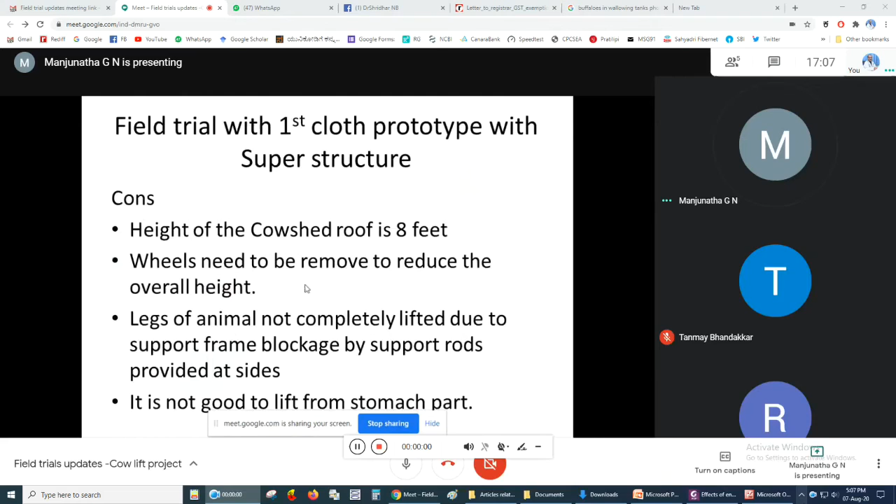Without superstructure, and also the second cloth prototype, we also tried without superstructure only. This is the down cow, around 4 feet height, and its back leg got fractured, so it is not able to lift or stand.

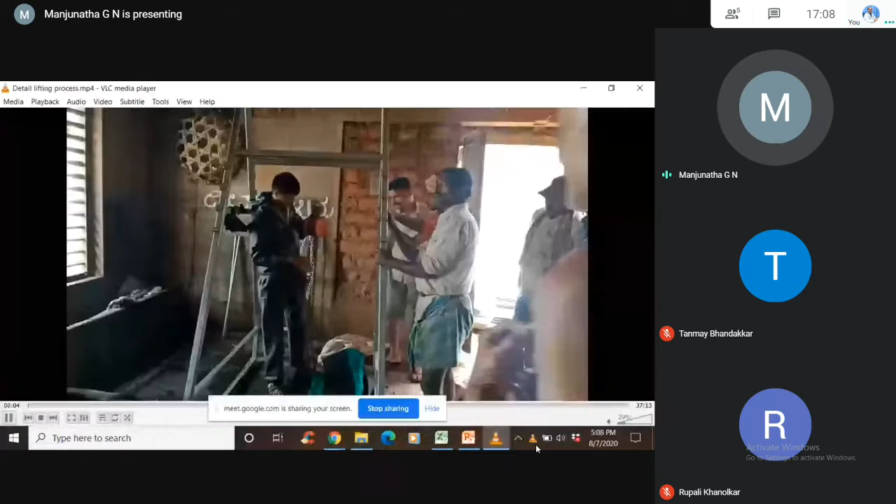So if you see here now, sir, the video is clear actually. It is around 10 to 11 GB, so I am not able to send it through Google Drive, but I will try to put it there and share it as soon as possible.

So this actually is the support rod where we got the problem, and directly I come to the point here. This is what we tried with the first cloth prototype. Since the height was more, we removed the wheel part, and we just used this, which comes around 7.9 feet.

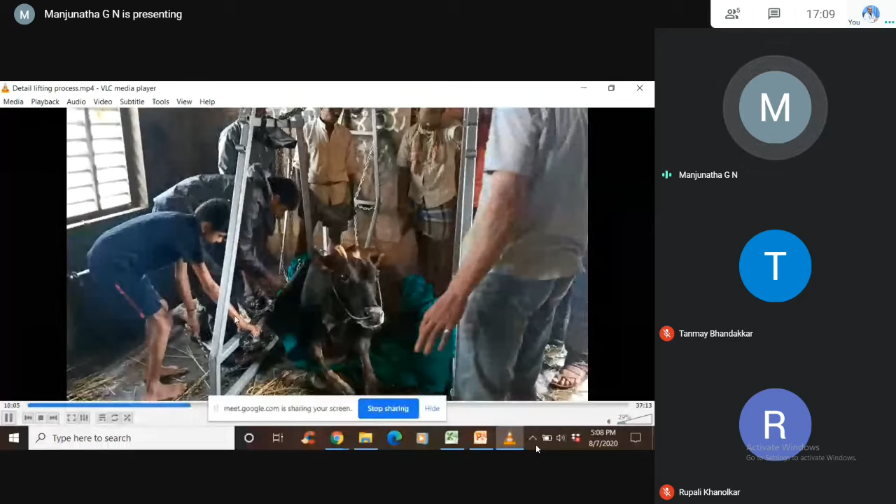In the video it is more clear, but we used this chain, which is around 3 feet. Now it is more, but we can reduce it to around 1 to 1.5 feet, it's sufficient. Also this hook, we purchased a standard hook and used it, but it is good we made it custom made, so there is no slipping. Sometimes it would remove while lifting, so that problem we faced.

Video is not... Okay, yes, actually. Yeah.

So actually, sir, I'm telling about the height issue, because this is mainly due to two reasons. One is, if you see here, I am pausing here, this support frame or support structure is getting blocked with this horizontal thing. Second thing about our cloth, this height is more. The cloth width, from rod to its backbone, is coming more, so it is actually not able to put its legs straight. So this problem we faced, and this is the height restriction problem we faced here.

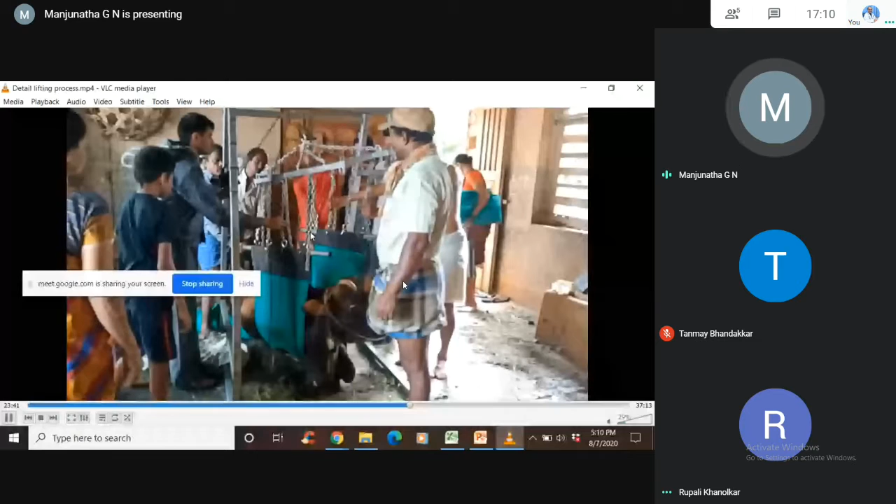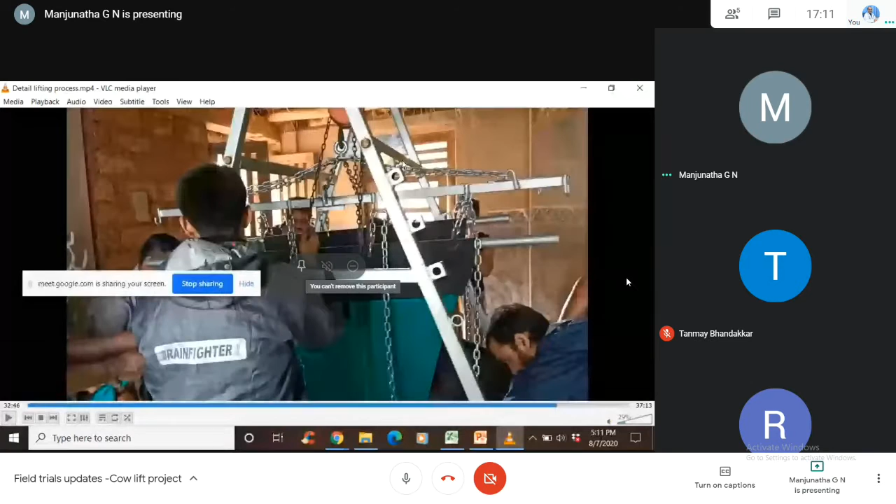And particularly, I go to another part here, and you can see the chain pulley got completely over, and we faced this issue. The chain gets locked, we're not able to move it further, and the cloth from back to the rod, this support rod, this height is more, this is also a problem for the height reason.

Actually, we are not able to hear you properly. I think the video size is very heavy, so maybe you stop playing and talk. Okay. Yes.

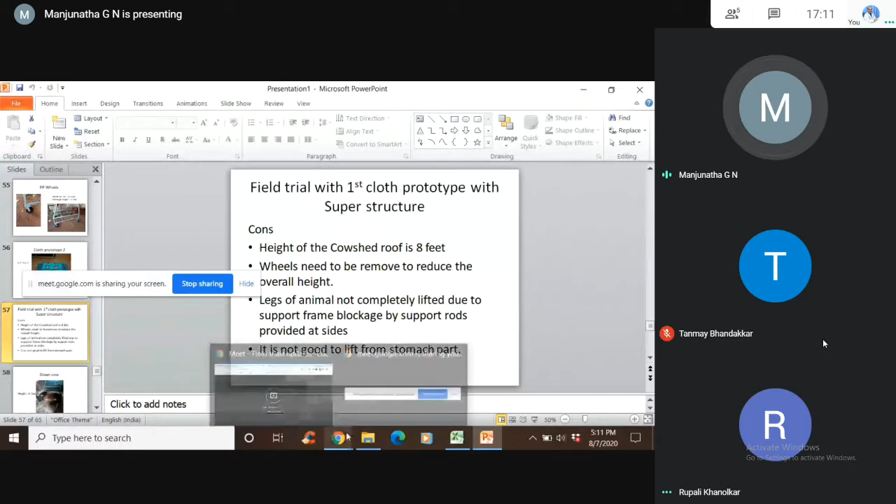So in that, yeah, it will be good. Yeah, photographs I need to take from the videos only, sir. Actually, no, it's completely no videos now.

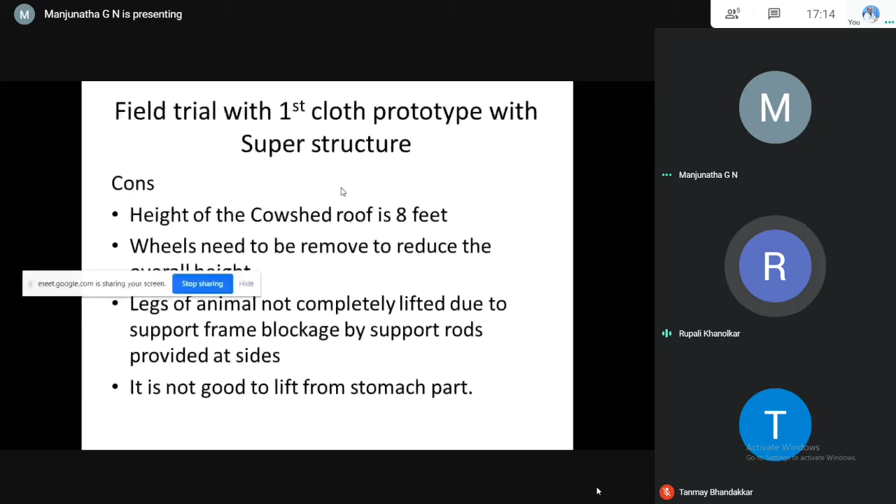In most locations, even in the earlier version, we had noticed that the height of the cow shed is usually not very tall, around 8 feet only, 8.5 feet. That's why we had reduced the height of our second prototype. Our first prototype was very tall, the second was short. So now this is the third prototype on which Manjunath is working, trying to make it tall again.

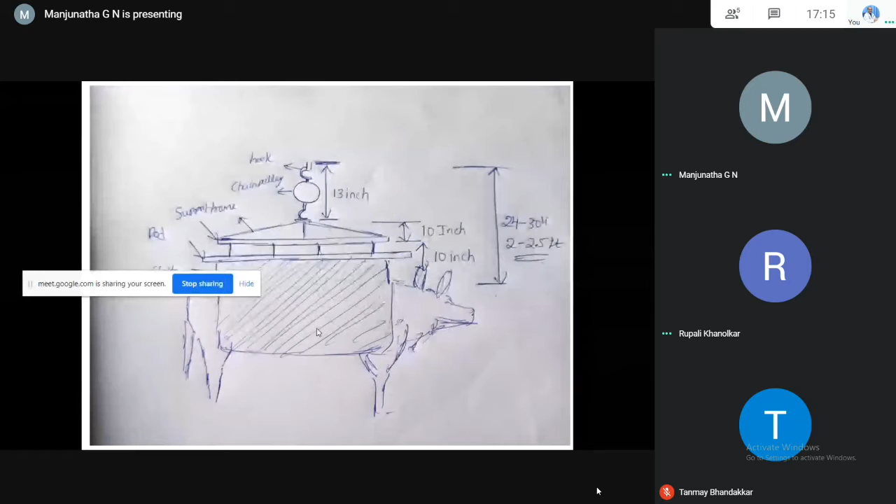Yes, ma'am. So whatever our design is there, particularly, after this thing, we thought that it will be more good for the... it will be more good for the, yeah.

No, no, again we need to make the roofing and other things. It will be trouble again for farmers. So they need to make the roof again, a temporary roof. Otherwise, it is sufficient - an open shed is okay.

Yeah, yeah. Now, particularly, it is coming.

Yes, sir. So now the present superstructure is more suitable for goushalas and dairy farms having the roof height more than 9 feet, which is properly constructed as a dairy shed. And for an individual farmer's house, like what we went for a trial, these things will vary.

So for that, if we make the superstructure which can vary between 7 feet to 9 feet adjustable height, like a barber shop saloon chair, he can make it adjustable, right? So that will be more convenient for him to take it in a slight way.

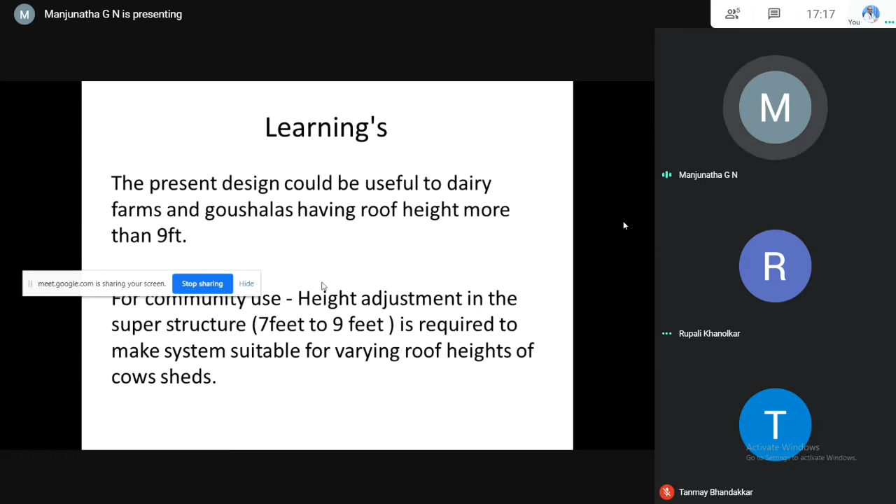So cloth 2, the second prototype, worked well. It is giving good support and is safe for the animal, and 3 to 4 persons are required. Maybe I can show through the video.

One person is required near the head, so the head cannot twist near the neck part, and the other 2 persons are one at the front and one at the back leg. We need to slightly use the neck, and we can put in this 4 legs insertion very easily. Otherwise, we thought it would be very difficult to put in the 4 legs.

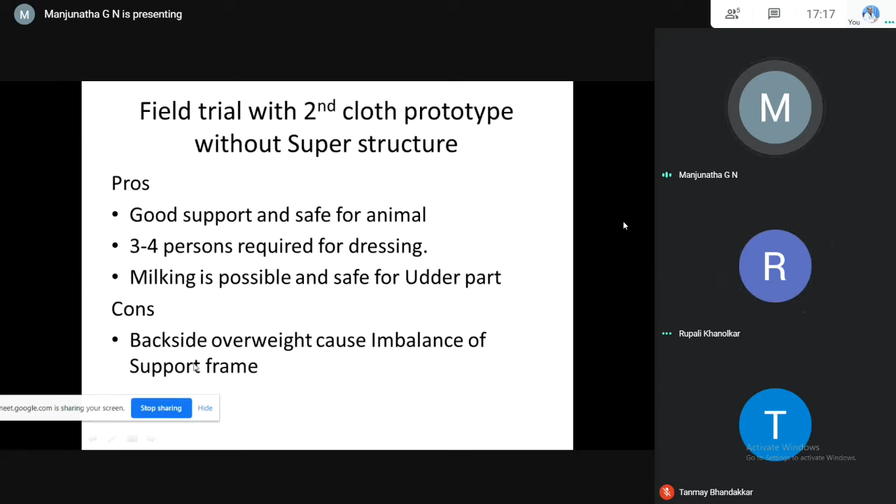And milking is possible now, and it's safe for the udder part. Cons: yeah, again backside overweight causes imbalance of the support frame. Here, superstructure was not there - we just used the chain pulley and lifted, so we got this backside overweight problem.

And the first cloth prototype cons, again with the cloth shrinkage and the cow - it is very difficult for a cow and it is dangerous. We faced it, so we did not do the experiment with that cloth.

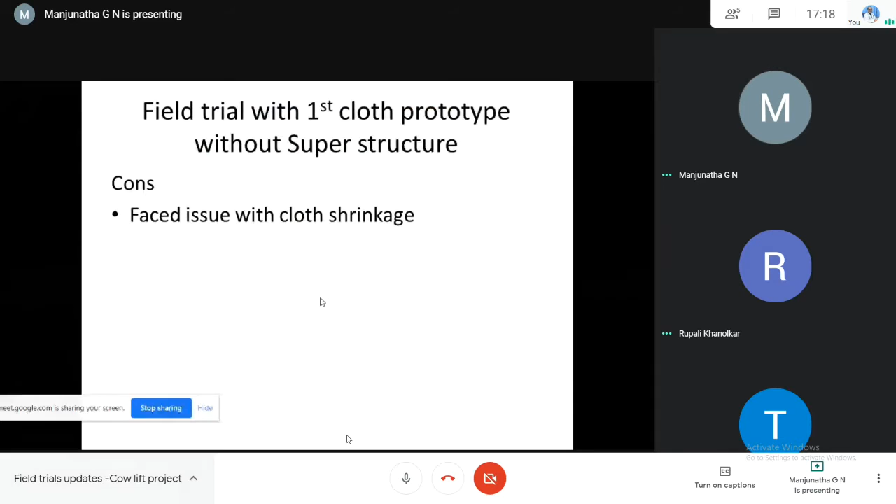Uh, yeah. No, no, no, no, no, no. Okay, sure, sir.

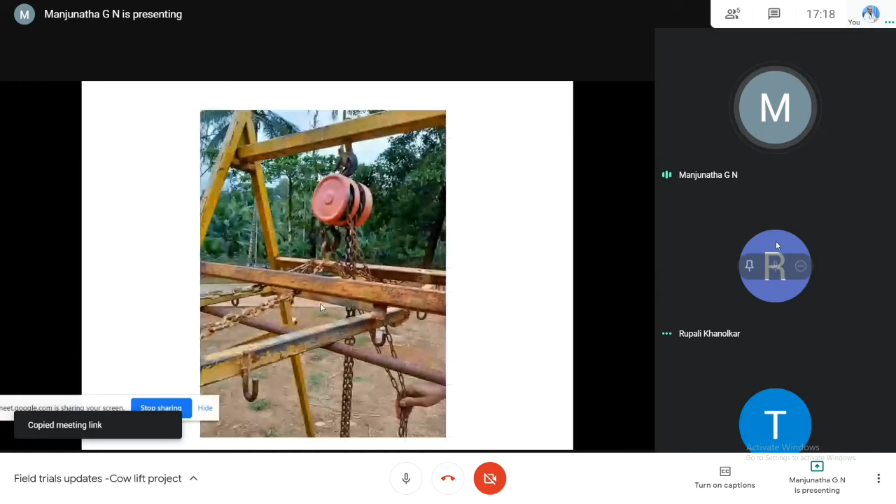Yeah, this is the way we did it open, and yeah, this is - we are able to lift it. Here you can see in this photo we reduced the height or width of the cloth, and we were also able to lift it properly until its full leg, and it is able to stand.

So here, if you see this image, minimum 2 to 2.5 feet we require as height will consume - particularly 13 inches for a chain pulley, around 10 inches for the chain and support rod, and another 10 inches to 1 feet for the cloth.

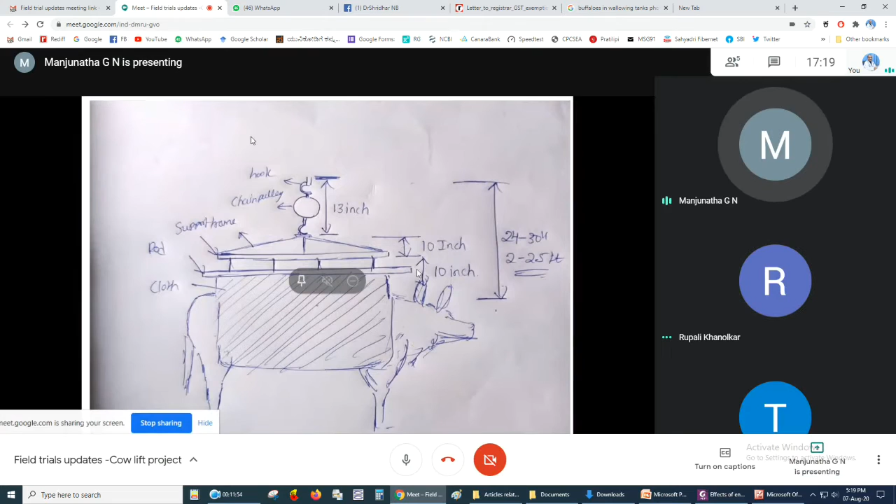If the cloth or support rod for the cloth goes below the backbone, it will hurt. So it should be above 6 to 10 inches. It will be good for the animal.

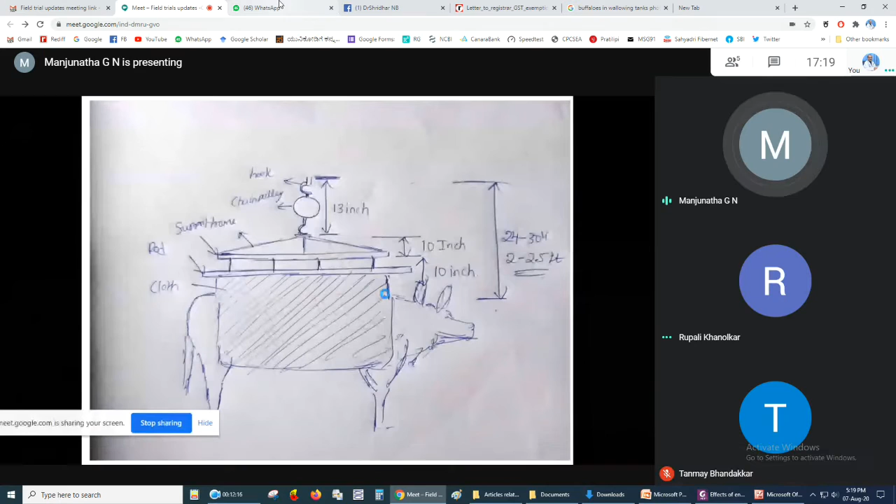And about the disassembly, it took around 50 to 60 minutes. Since we remove the wheel bolt also, it takes around 20 minutes, and time required for reassembly is around 25 to 30 minutes. Manpower used is 2 persons, and 3 size spanners were used.

That's it, sir. So yeah.

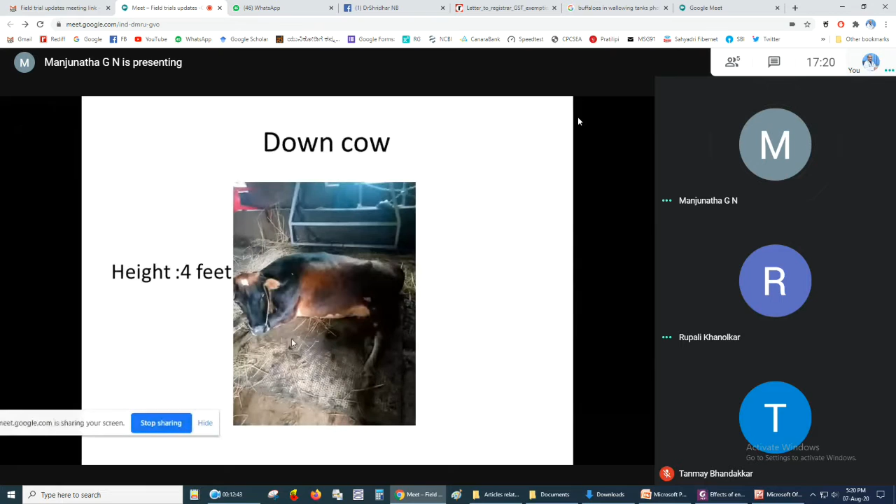So, do you have any suggestions for overcoming this problem? Now you tried it with a medium-sized cow. What if it was a heftier cow of around 500 kg or 450 kg weight? In that case, separating out the chain pulley and attaching it to the roof - I don't know if the roof of the cow shed would have necessarily got the strength to bear the weight of the cow, because the chain pulley is directly attached to the roof. And what if the roof collapses? That's my worry.

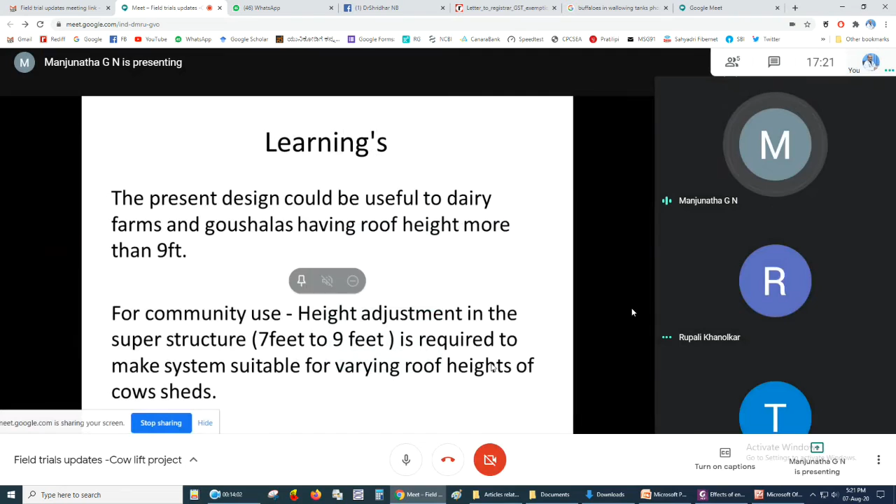No, actually the poles are strong, whatever roof they use, but the difficulty they face is the overweight imbalance problem. The backside overweight is there. If they use it openly, that's what we faced with this medium sized cow also. It's very difficult - each time they need to make it sit, make it stand, and balance it again with 2-3 ropes. That consumes time also. But if the superstructure was there, we can put 2 rods and balance it very easily.

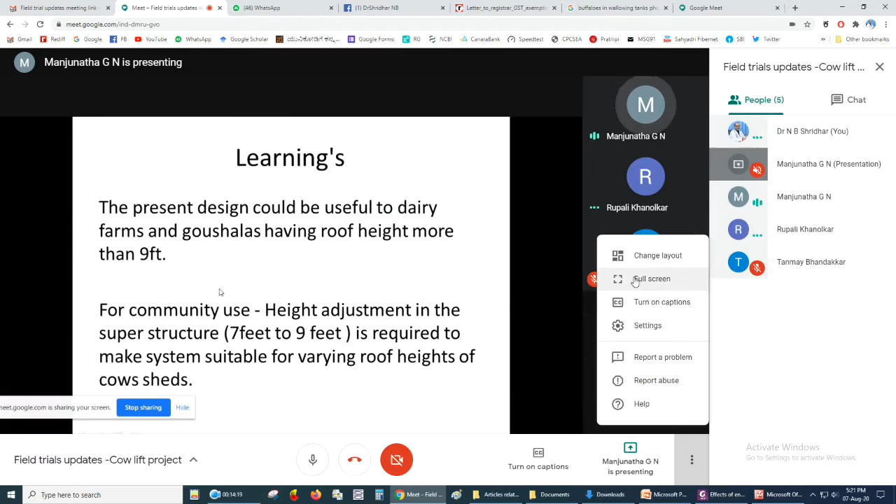Sir, ma'am, this design now is more suitable and ready to give for trial, almost like we can do in our Vardali Goshala also. So more than 9 feet roof where the dairy farm cow sheds or goshalas are there with high roof structure, they can take it and use it. So there is no issue in that.

We can lift out of 5 to 6 feet in this our present modified version. So this is for community use, particularly for individual houses.

I was asking whether this is an assemblable type of structure. This is assembled in the cowshed. This can be assembled in the cowshed.

Yeah, yeah, yeah. What we did also, we deassembled outside the cow shed and we took it inside and again reassembled it. Yeah, that's what we did. Okay, yeah.

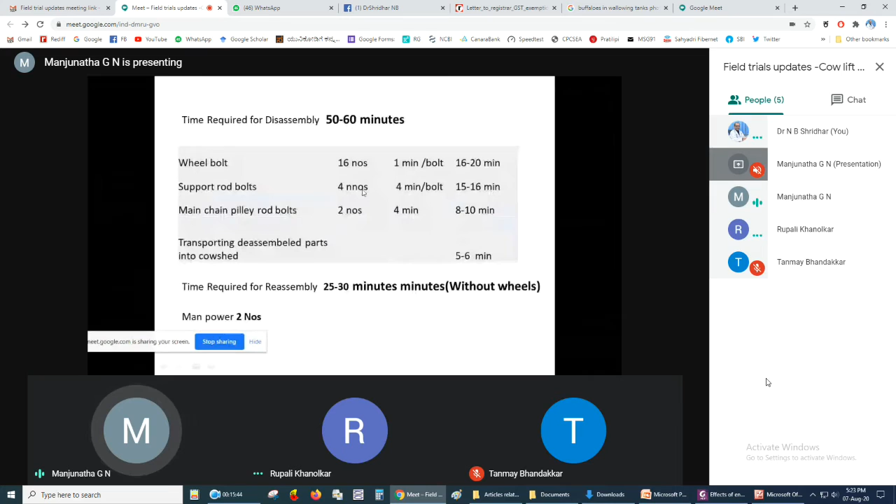So as I told sir, around 25 to 30 minutes for reassembly. Without wheels and for deassembly, with wheels also we removed - so it took around 50 to 60 minutes. Two people we actually did it.

For now, community use for 7 feet to 9 feet if we consider the roof height, which varies according to individual farmers' cow sheds - so it is better to do the superstructure with adjustable height.

Yesterday I discussed with the welder, so he told it is possible, with some bolt and nut, like a barber shop.

Manjunatha, one idea that can be tried is like a telescopic lens. So for instance, the height modification currently being done is we have added a rectangle at the bottom. Instead of rectangle, if we keep the slope and have two rods, one rod goes inside the other rod, and then there are nuts and bolts so that the height can be changed.

So we make slots in the two - the bottom rod is having a bigger cross section, so that the current rod goes into that, with multiple holes. Based on which hole we select, the height can be changed. Yeah, same concept can be used so that the height can be modified.

The second possibility - here the issue is that the height change is going to be discrete, not continuous. So based on how much spacing we give for the holes, our height is going to change in steps. But if we use a lead screw, the height can be changed more smoothly.

So in the barber shop etc., what you are saying, generally they use the lead screw. With lead screw the height change is better, but I don't think we require so much precision in terms of height change. We require, let's say, 7 feet, maybe 7.5, 8, 8.5 feet - I think that should be good enough. Maybe three or four options I think will do the work.

I hope you understood. Otherwise, I will draw something and share with you.

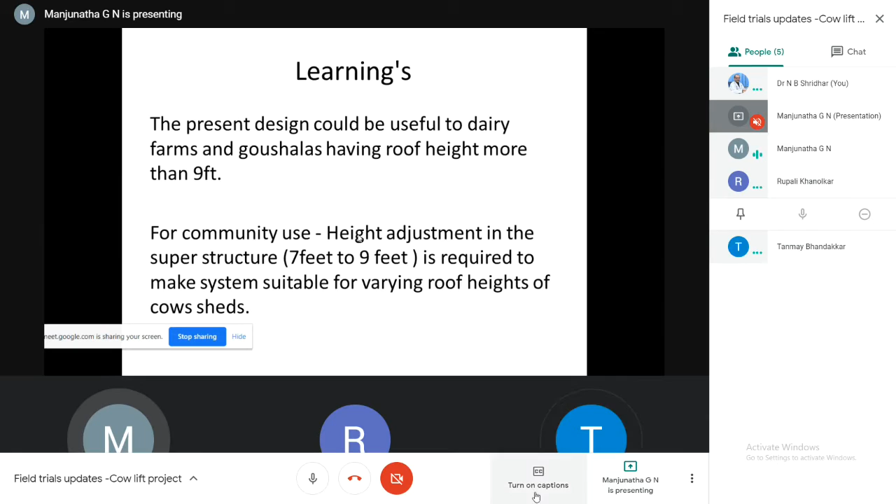No sir, the same concept we thought of in the above structure where the top structure was there, right, in our first prototype - same actually we thought about that. Instead of a triangle, we can go with a slightly parabola - not parabola, it's trapezium type. Sorry, I was wondering.

Okay, so if possible, you can share a sketch of that with us through email. Yes, sir.

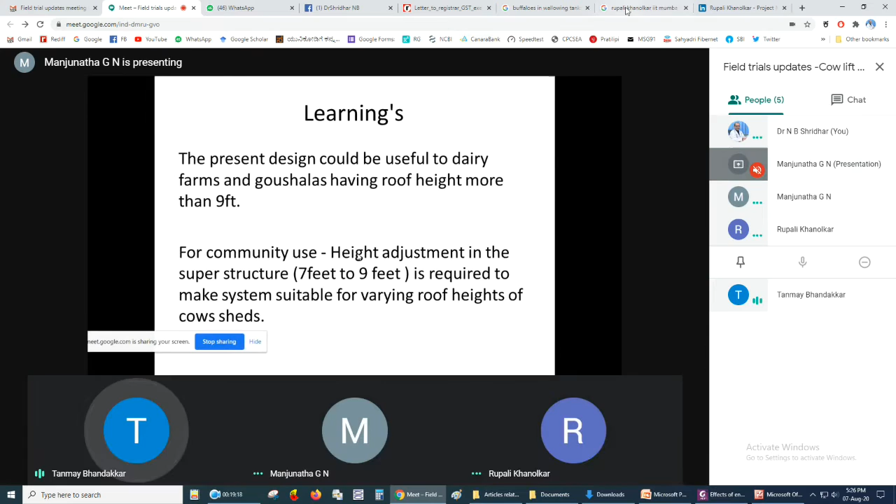The second thing I understand is that sometimes the cloth material increases the height, and so we are not able to get the required space for the legs. Am I correct in this? Yes sir, because your cloth length is so large that the cow's legs are not totally becoming straight. So this issue we are facing, that's why the cloth dimension matters.

So as I think last time you mentioned that we can have provisions for adjusting the cloth height also, isn't it? Last time you had showed me some picture for that.

Yes sir, it is safe, it's above the backbone. But if it is too much, like 1 feet, 1.5 feet, it simply consumes the overall height. Fine, got it.

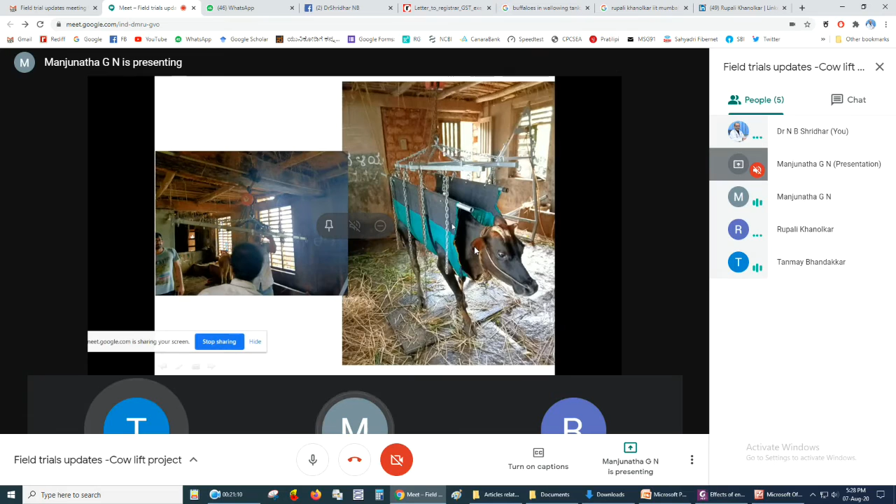So second thing is that once we do the adjustable height, I think then it can take care of all the possibilities, isn't it? If you have adjustable height, then it can be used anywhere, even big goshala to maybe a small farmer, all places, I think we can use it.

Yes sir, but there is a chance that big goshalas may use the first concept only because anyhow they are not giving it to outside, they only have big cows. Sridhar sir, correct me if I'm not wrong, like hybrid cows, very big in size and height, they may prefer this, and this can be usable for dairy cooperative societies, particularly having this type of cow shed with a roof structure.

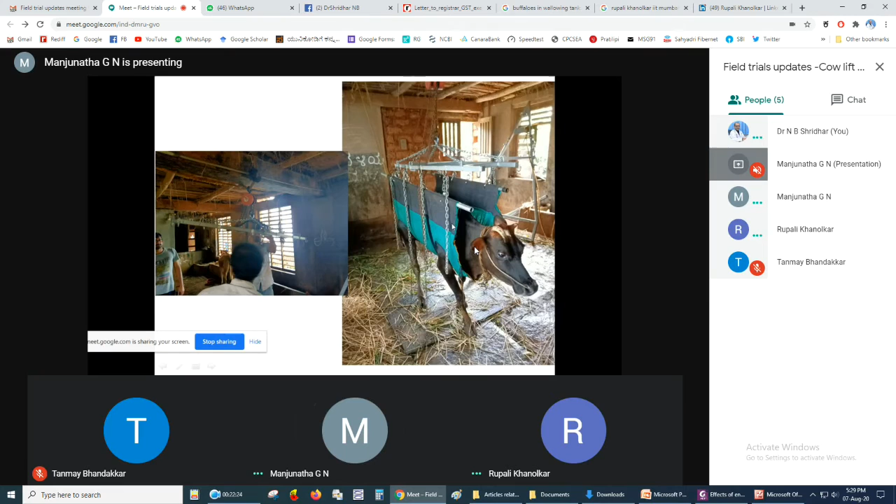Okay, so at household level there are bigger cows also in the goshalas. In the case of an individual farmer, you have bigger hefty Jersey cows also, so that issue is going to be there.

Where we visited Kanle, he has only big size cows, like an individual farmer.

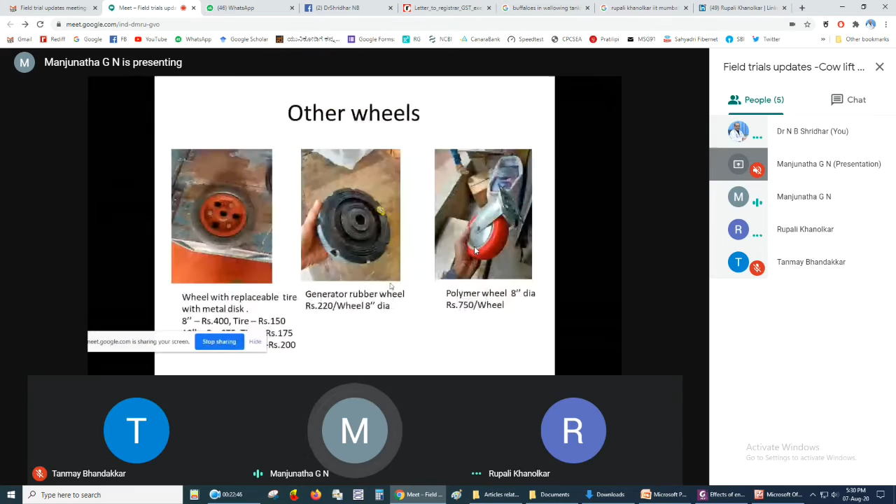That's a good suggestion. Manjunath, you can take photographs and below the photograph you can put the name of the variety of the cow, approximate weight, and get it vetted by Dr. Sridhar, so that when we start making the report or anybody asks us, we can say these are the varieties and these are the weight ranges on which trials were conducted, and we will be very sure. If they have something beyond that, then we'll have to take care, otherwise for this range we are sure.

Height of the animal, weight of the animal, and the variety. No, weight you will have in literature, right? You will have the rough range of weight of the animals. He won't be able to take that, that is true, but he can take height.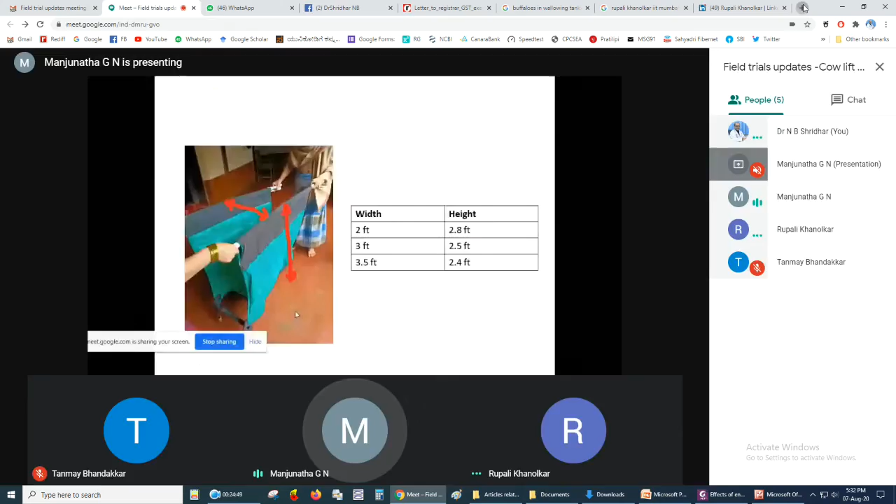So maybe if we go to Vardali Goshala, there all types of cows are available, from Malnad Gidda to HF. I will take one, consider its height, and this thing will be considered.

Okay, okay, okay. Sure, sir.

Manjunath, one question you had mentioned was the interference with the support rod. Can you explain it one more time?

Yes, sir. So, sir, here actually, if you see here, the chain pull is ended, and here this chain is actually blocking our subframe, sir. So this is initially the condition, but the height of this block is also more. That is also now about this door, like the overall height with this block. If this is not there, still we're not able to lift it because of the chain pull. Chain pull is ended here only.

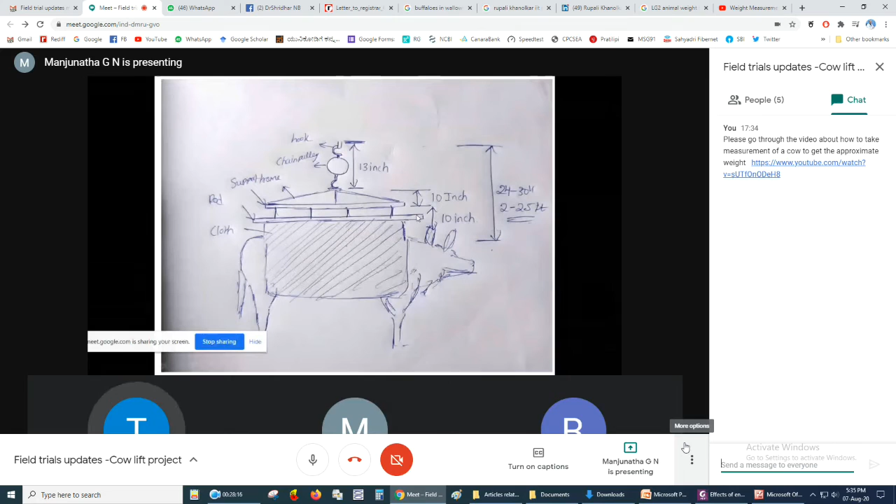Okay, so when you are lifting, the support rods, they are being interfered by that structure with chains.

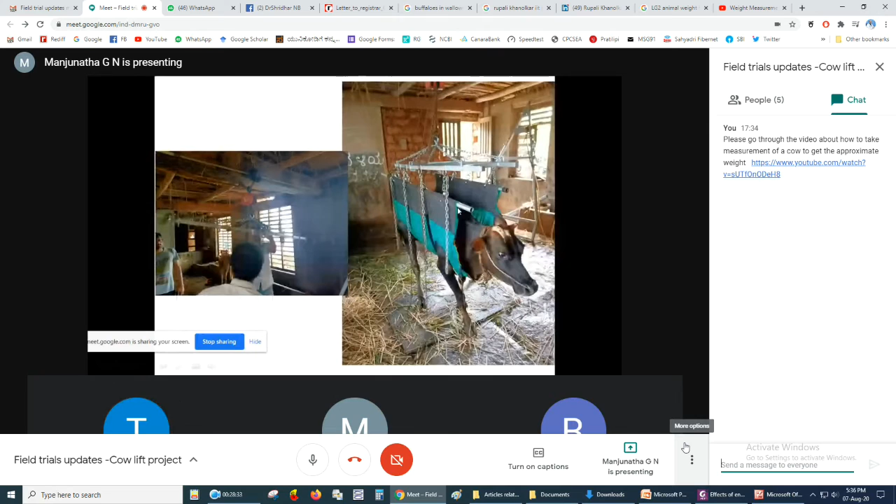Yes, sir. I hope if we go for that adjustable height, this issue will not occur. That time we need to slightly change the structure of our superstructure, instead of like a triangle we can make it as a trapezium, and we can go for it. Or as you suggested, from the bottom also we can try it out, if it is possible.

Yeah, and if you see here the top section, we can remove it, that's what the welder told, and it is also consuming around 4 to 5 inch height, 4 inch around, this part, the edge part.

So what was done actually was that a triangle was created and the triangle was welded. If you see there, a triangular plate was welded there to the rods. Yeah, fine, that can be chipped. It is possible to chip, and we can give another plate.

So height can be somewhat reduced. We can still make it reduced. Okay, fine. Yes, sir.

Sir, maybe I will send you the basic pics, sketch of both the diagrams, as you suggested, one from the bottom and another from the top, for adjustable height mechanisms, so that 5 feet can be taken as the maximum height, and 2 to 2.5 feet we can give as clearance, which is required for the chain pulley and support rod and these things.

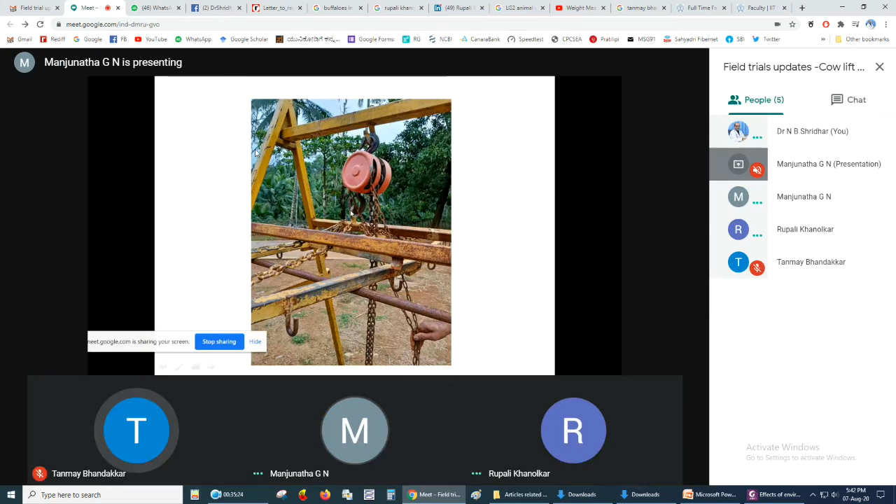So then there are three things. We'll go for a basic sketch, taking the measurements of the different types of cows and sizes, which can be useful for the cloth prototypes also, future cloth prototypes. That is we need to make it. I think these two things we can go for, sir.

And we can return this modified prototype to the Vardali Goshala as soon as possible. Once this one in the trial place is completed, we'll move this back to the Goshala.

Actually, yesterday Ravindra sir told that he went there and it was slightly okay, but he's not sure about its... we need to check.

No, I think this is good. So, as discussed, Professor Bhandakkar will guide Manjunath on the detailing of the second version design, and then he can do that design, and we can use it in the goshalas, sorry, in the smaller cow sheds of individual farmers' houses, and that will be useful in places where the roof height is lower. Over there won't be any problem anyway.

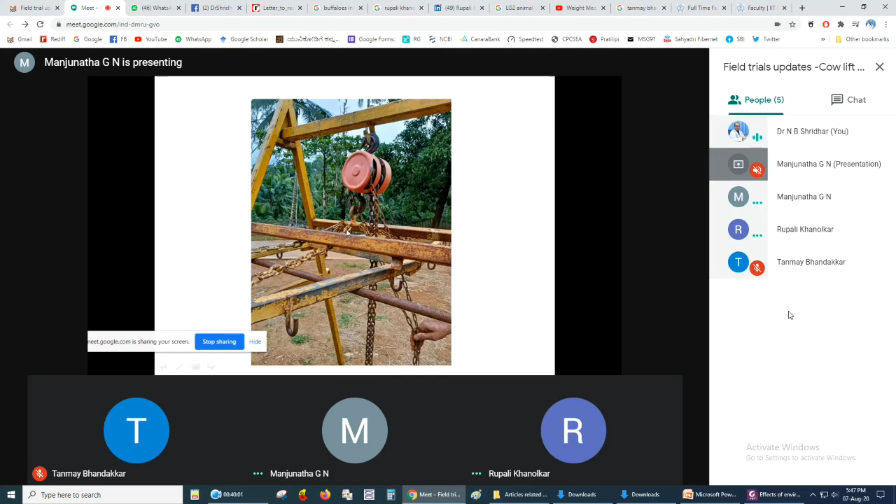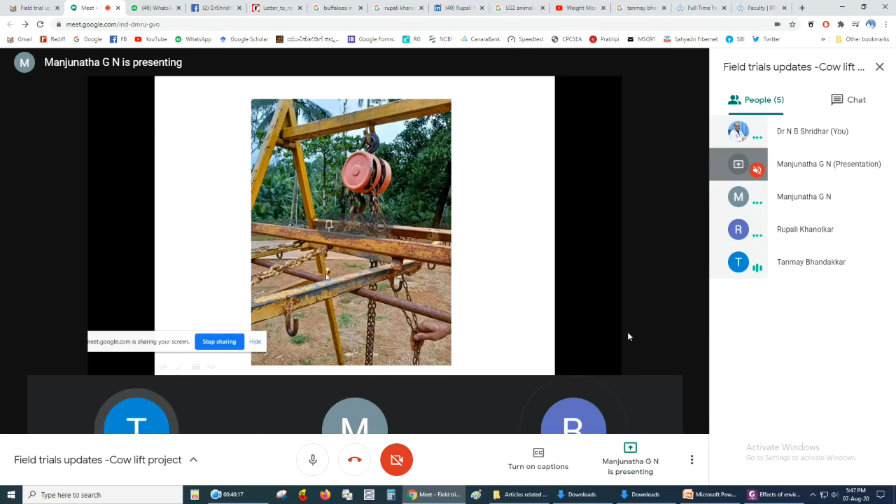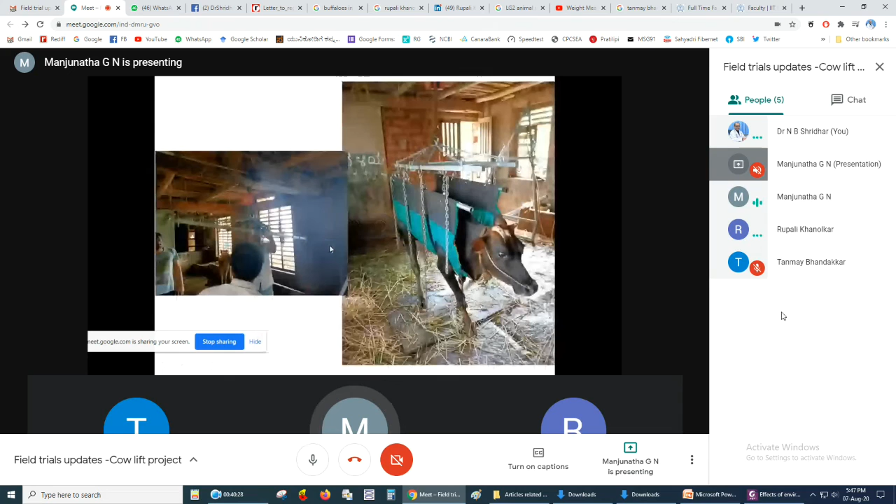Yeah, yes sir. So Tanmay, one more point actually. Go ahead. Yes sir, so if you consider here this solid square,

we can say to put the rod. Now it is 6 inch something, but in the field what we experienced is we need a very minor adjustment. Once it is completely stand, it has to balance, and this length is more, sir, somewhat. If it is lift more, if you put the rod here, the leg will go above the land, and if put here, it will slightly go down. So very minor adjustment required compared to this 6 inch, somewhat.

Can you repeat it again please? The voice was breaking up.

Okay sir, once the cow is lifted, this support rod we are giving at the two sides, through holes. Now at present, the gap between these two holes is more - if we put it in the first hole, the cow leg will be in a bent position. But if we put it in the second hole, the cow leg will be above the ground. So a minor adjustment between 1-2 inch like that is possible. It is well and good, sir, in the future we can do it.

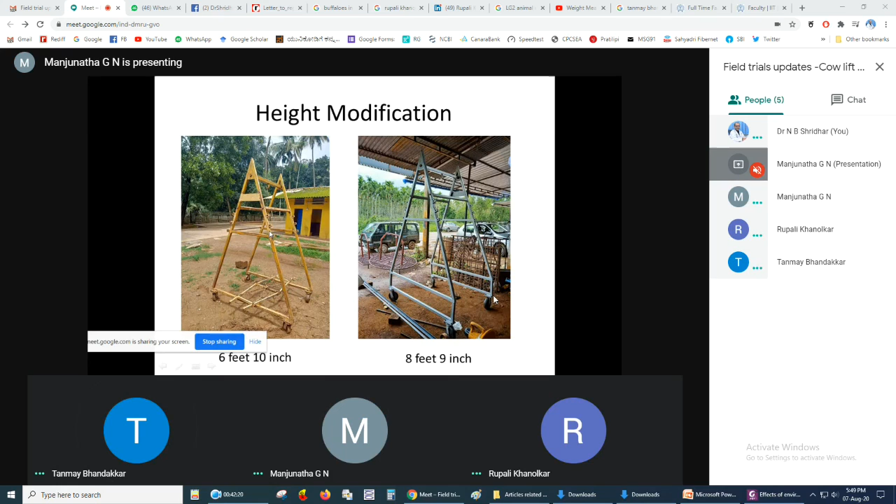Okay, yeah fine. Yes sir, so please, as Madam was telling, please document all these changes compared to the previous version, so that we know what are the differences. Yeah sure sir.

Sure sir. Dr. Sridhar, the MOU is under making. In fact our legal department has given a simplified version. They said keep the MOU specific to the project activity rather than a general MOU. So I have worked on the draft and sent it to them - we're waiting for the response.